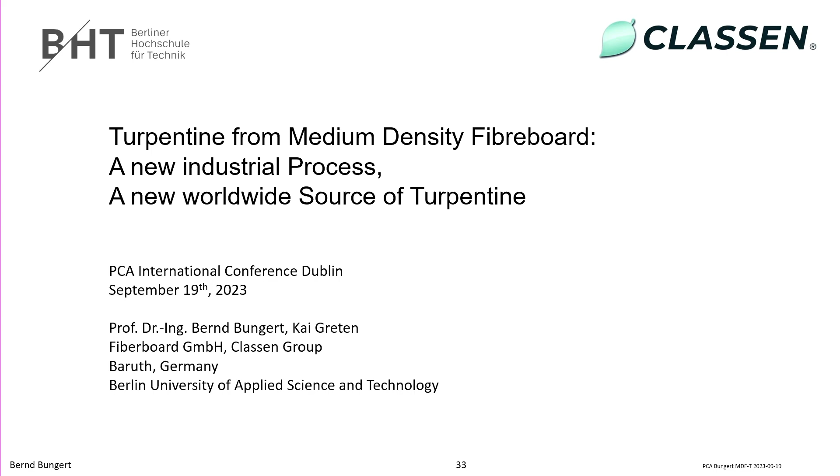11 years ago, I became consultant to a company called Fibreboard. Fibreboard is a producer of laminate flooring as well as medium density fiberboard. They process around 1 million tons of wood dry matter per year. I'm essentially the external process development department, one can say. Even though I'm not a member of the company, I have my office there, so it's quite an interesting situation—I'm working for this company.

As you see here, that's the site in Baruth, 1 hour south of Berlin. On the left-hand side is the MDF factory producing the medium density fiberboard, and on the right-hand side, the white buildings, that's the laminate flooring system. You may know these floor products with a tongue and groove system, where you click together these sheets to cover your floor. Together, this is the largest integrated MDF and laminate flooring site in the world.

Maybe as a matter of scale, you see at the bottom 800 meters width and 500 meters length, so that's quite a bit. On the left-hand side in the middle, that white building is the chip storage—essentially one soccer pitch filled with wood chips, lasting maybe 3 or 4 days. So you have an idea of the order of magnitude. It's a bit smaller than a pulp mill, but capacity-wise and size-wise, it's even bigger.

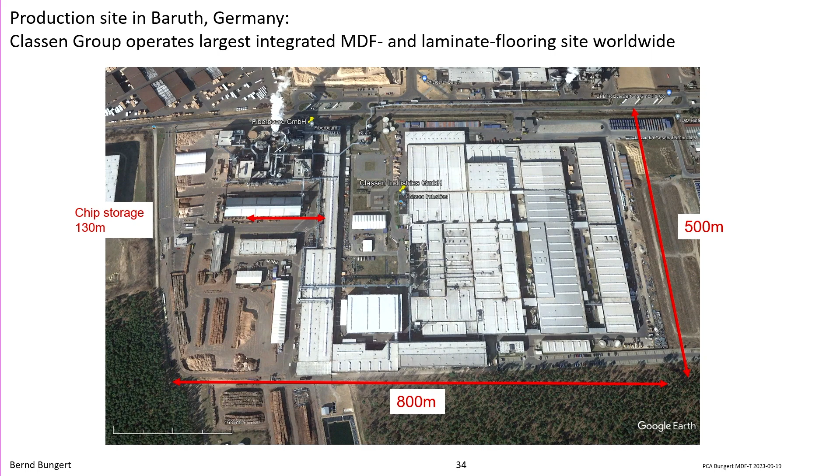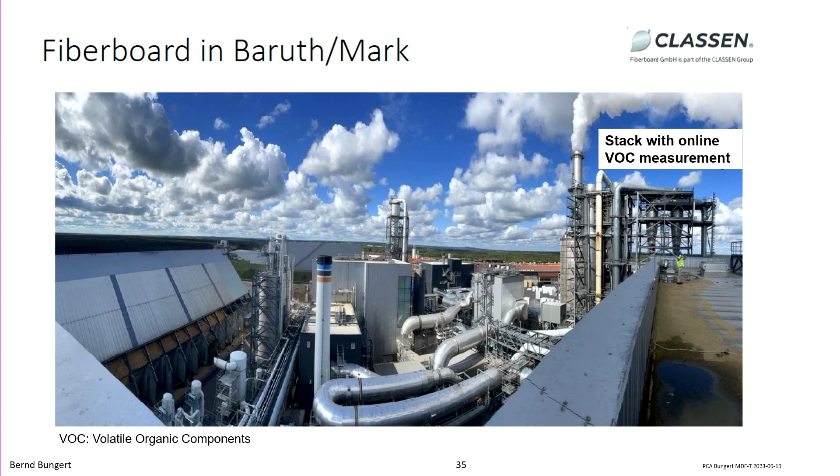This is just another impression, so it's industrial scale operation. You see here a photo of the stack with the online VOC measurement—VOCs are volatile organic components. This is where I started to get involved with pine chemicals. As you can see in this flow chart, the process—just a very quick introduction on that one.

400,000 tons of wood dry matter are being processed: debarked, sieved, washed, and then pre-steamed, being heated to 100 degrees centigrade. This is actually very similar to chemical thermomechanical pulping in the pulp industry.

They're then fed into a digestion unit where they're being digested at 170 degrees centigrade, 9 bars. In pulp and paper, it would be like 130, 140 degrees centigrade.

So far, very similar. Then comes a refiner, that's a rotor stator mill, 2 discs rotating, about that size in diameter. This drive has 10 megawatts. I mean, 10 megawatts is a motor from here to the end of the stage, and we use a 500 kilowatt pony motor in order to start up the big one. So that's quite a bit.

That alone makes 10 tons of steam per hour dissipating the electrical input. That's quite big. Now comes the difference to pulp and paper.

In pulp and paper, the steam and the fibers are being separated, and then the steam comes out anyway, including the turpentine. So these guys need to take care of it. We don't, or we didn't have to until recently.

The process continues. There's quite a remarkable thing. Those 50 tons of wood dry matter, 20 tons of steam, 40 tons of water go through a pipe of that diameter, 150 millimeters, with a speed of 200 meters per second, or like 750 kilometers per hour. That's really remarkable. And then injected into a dryer of that diameter, 50 meters long, 50 meters tall.

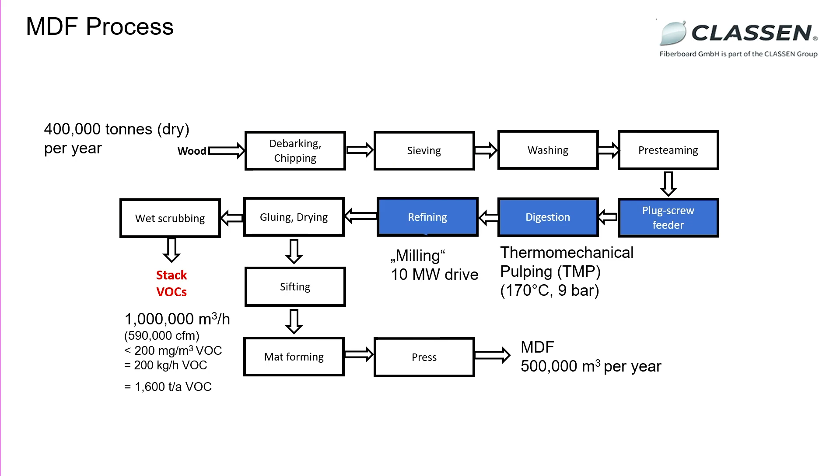Now, the solution in the end led to this. We came up with a new route to produce turpentine. You know, of course, gum turpentine, wood turpentine, even though they're suffering a bit, crude sulfate turpentine. And this is MDF turpentine.

This is from my carry-on luggage. I had it in my toiletry bag and declared it as perfume. If that were to be CST, you would be running away. But you don't with this one. And it's really nice. So that's gum-like turpentine that we talk about.

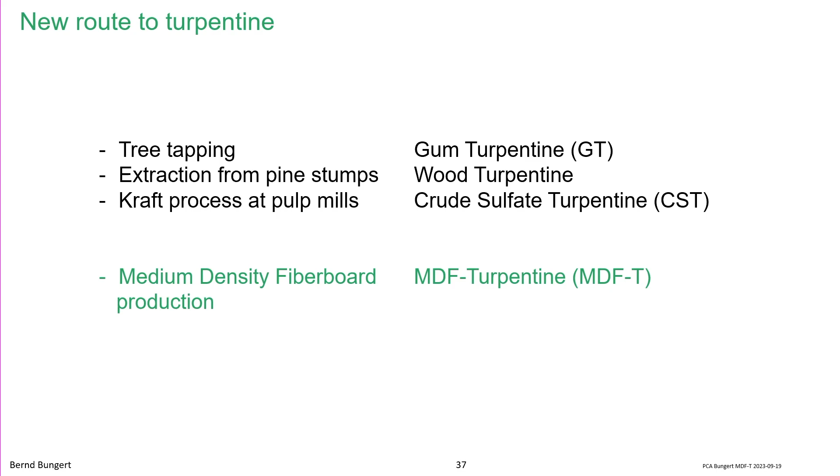And then the next question is, how does that work? What we essentially do is upstream from the place where we add process chemicals, glue and other stuff, upstream, where the wood has only seen steam, nothing else. We take out a certain amount of steam at a certain place, which is quite anti-intuitive, and we can calculate the amount of steam being necessary. That's a fact, a matter of process design, but essentially thermodynamics.

Depending on the amount of turpentine present in the turpentine composition, I can calculate the amount of steam that has to be taken out. What we then do at the moment is we incinerate it, sorry to say, in order to solve the problem. You see the solution on the left-hand side, the concentration goes down to 50 milligrams per cubic meter, 50 parts per million, so well below the emission value of 100. Problem solved. So that was already quite exciting.

Then we realized, oh, wait a minute, there might be a value to that thing in there, those so-called terpenes. That's when I got involved with your industry. Three years ago, I had no idea what rosin and turpentine are. I had no idea at all.

And then we realized, oh wait, we could possibly condense it and then sell it as a product. And obviously, we shifted from the left-hand side to the right-hand side, and we can produce, and we will produce, 150 kilograms per hour or 1,200 tons per year.

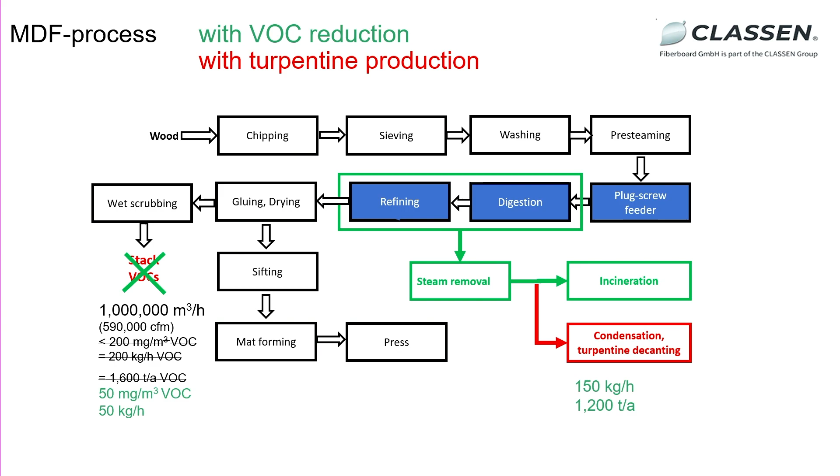Now, how does it look like? This is just a few impressions of the pilot unit we're using, as well as the incineration line. Currently, it's incinerated as a state.

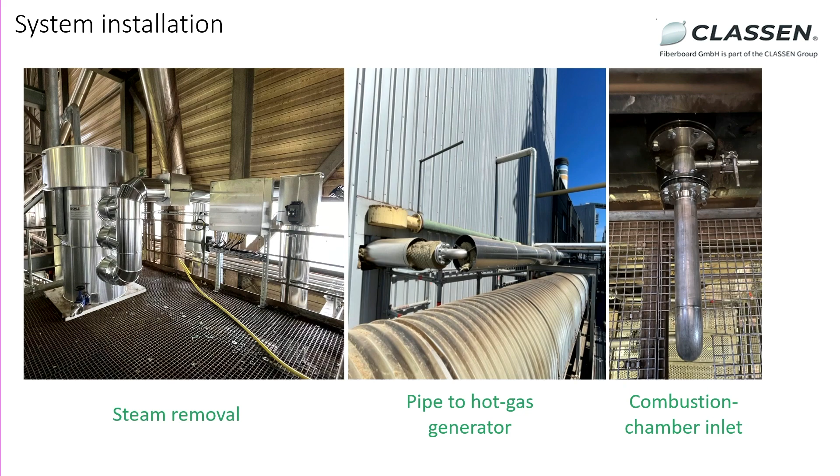Here's a quick summary. First, the emission reduction is an industrial operation. It works very fine, low investment, low operating costs. We even make use of like 1.8 megawatts of heating value, so it's even a plus for the power station. No authority approval needed, that's a quick solution within a couple of months. So the industry is quite happy.

Turpentine, we did the detail engineering already. The design is done, procurement is underway. The plant will start production next summer with 1,200 tons per year. That's the German summer, so that's July. We have authority approval started. REACH certification is granted already, so we can export any moment. We have heat recovery, so the OPEX, the operational expenditure, is essentially close to zero. And there's very fast amortization because the investment is not that high.

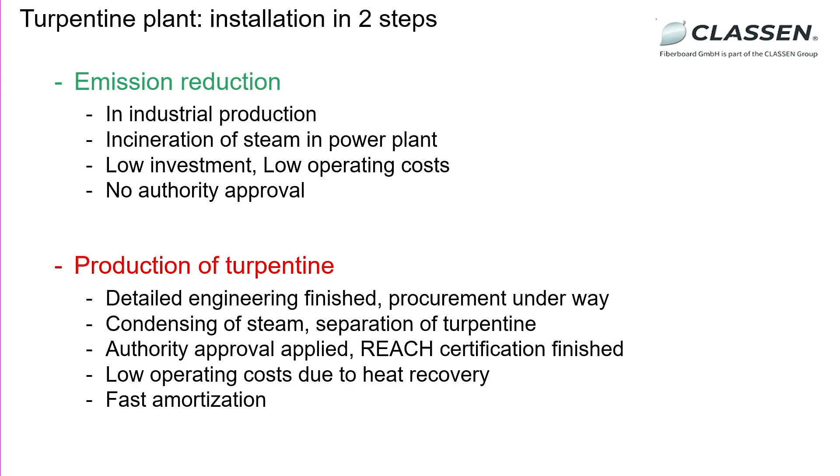Unfortunately, we're using Pinus sylvestris, Scots pine, and as a result we have some 48% alpha-pinene, 3% beta, 35% delta-3 carene. That's the way it is if you use Scots pine. There's no choice about that.

And we produce at pilot scale, we can produce like 50, or at least provide 50 kilograms per hour. So barrel-wise or IBC-wise, we of course deal with samples, but we cannot really produce at scale. And that's what you see here.

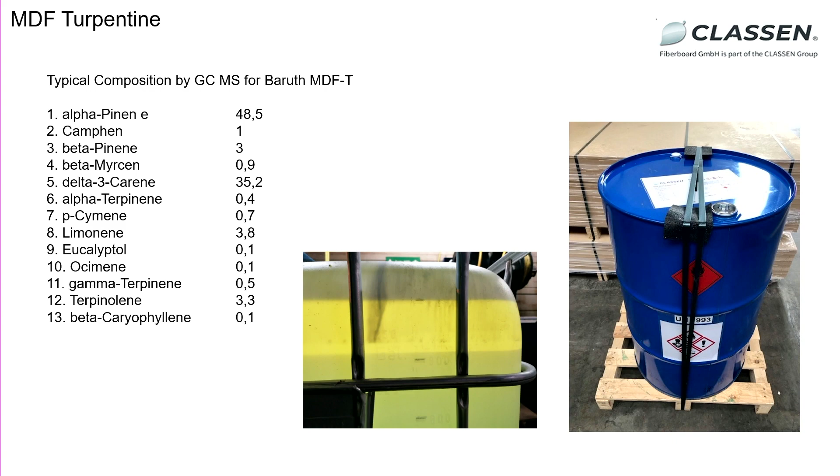On the next slide, you see a book. It's called Die Gewinnung des Harzes der Kiefer, the production of oleoresin from pine. In the former East Germany, German Democratic Republic, there was extensive tree tapping until 1989. When the wall came down, it immediately stopped because of labor cost. So it stopped immediately. But they were, of course, investigating that thoroughly and actually sent that book to Alejandro Cunningham because they have described extensive tree tapping techniques there and also how to stimulate the tree.

Quite interesting, we source our pine from the former East Germany as well as from the Polish National Forest. And therefore we have, of course, a very similar composition. You see here, this composition is very similar to what we found earlier on and what I reported. So the message is the process does not change the composition. Our turpentine is essentially the same as the former East German gum turpentine, unfortunately made from Pinus sylvestris. But we can change that.

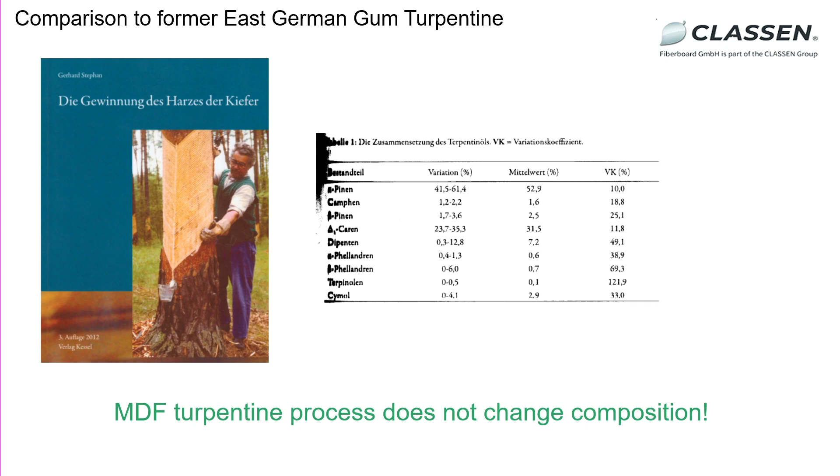The next slide shows you our emission values. They're not really important to you. You see they're high on the left-hand side. We start our method, they are low after that. But what you can see is it's a stable process, a stable process in industrial operation.

That's the message. And once we have a line of steam going from A to B, which is the power station, it's very obvious that if that runs so stable, we can easily take that steam and instead of incinerating it, condense it, subcool it, decant it. And the rest is very similar to CST recovery. Once you know where to tap the plant and how much steam to take out, the rest is normal chemical engineering stuff, not a problem at all.

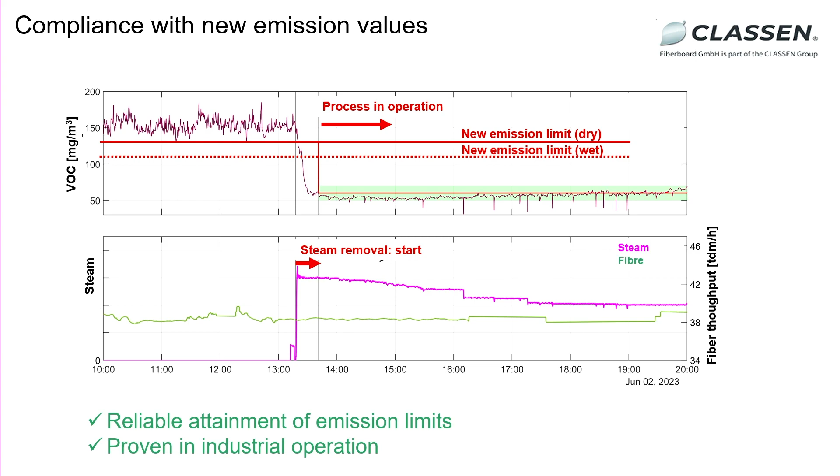So the benefits are obviously, first of all for us, we meet the EU regulations. If you build a new plant in the United States, you would not go for maximum achievable control technology, which is buying regenerative thermal oxidation. That's very expensive, millions of dollars of natural gas being fired to operate that. But you can go for BACT, and indeed there are companies considering that at the moment. So operating costs, millions of dollars, can just be avoided.

And then, of course, our subject here is revenue creation by turpentine production, and you can actually do both. I want to mention there's no influence on product performance, which is important because we don't sell turpentine, it's only a side effect. We sell medium density fiberboard, of course. So the product is not involved at all. Low investment costs and almost no OPEX.

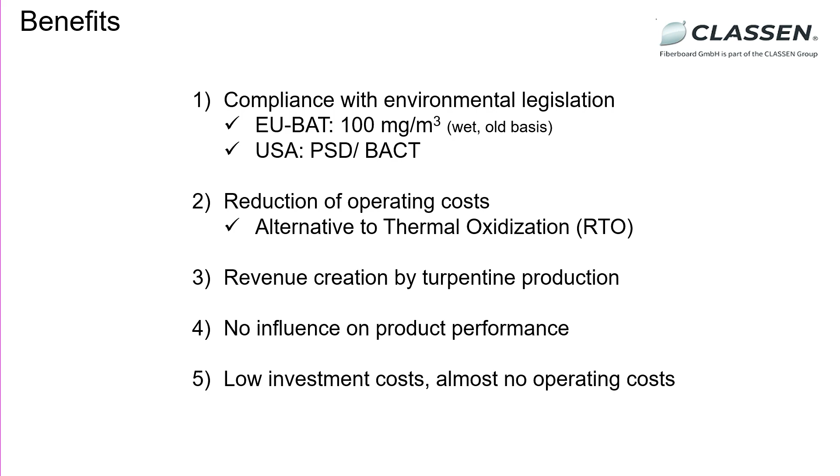That gives rise to the question, where does the product go? This is something that you know, of course. This is the CST route, the gum turpentine route going to the CST distillers. Many of them are around here, of course. And there are also distillers who do not take care of CST, so I call them gum turpentine distillers. As you see, our material can go either way, either to the CST distiller or the gum turpentine distiller.

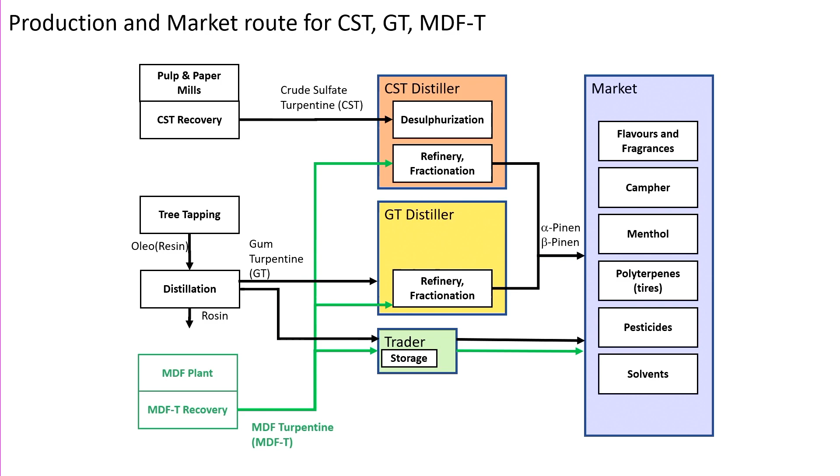Now let's take a look at the market for crude sulfate turpentine. We see the numbers that Michel is giving us. Thank you very much, Michel.

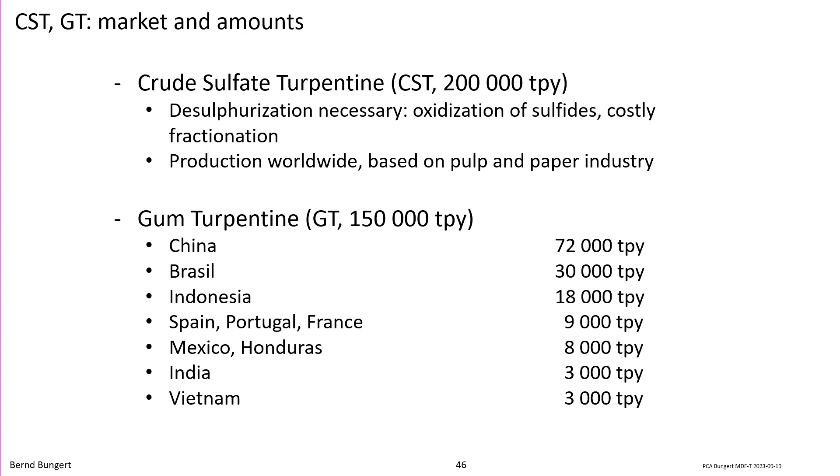I'll give you some business cases later on and we'll show you there will be local sourcing possible. If you ship a container, an isotainer with turpentine from Europe to India, that would mean you'd spend some $200 or so, plus minus, just an order of magnitude.

You'll also ship some carbon footprint with it. That is not good for the product if it's a consumer product. On top, in our case, it's a good story because we put something bad into a bottle and sell it. So that's quite a nice story. In the end, MDF turpentine combines all the advantages of all those processes.

Now, how much is it? The next slide will give you first of all a theoretical overview. The total amount of medium density fiberboard produced uses some 112 million cubic meters. That boils down to around 92 million tons of wood dry matter. That's a bit less than pulp and paper, but it's quite a number, obviously.

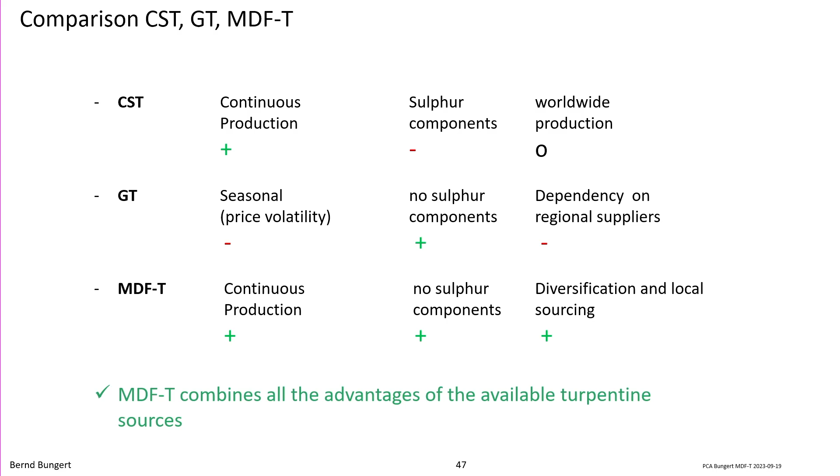You also got to consider, and then I go to the next slide, some 50% use pine. Then there's spruce and fir, because softwood is essential, as hardwood gives bad mechanical properties. And some also use acacia, rubber tree, and eucalyptus. But in the order of magnitude, 50% use pine.

So here's the numbers. In Europe, there is around 20 million tons of wood being used, giving a theoretical value of 58,000 tons. 50% of that would be like 30.

In Asia, one must say the 65 million cubic meters are nameplate capacity. It is not really known how much is produced there or how good they are in operation. Anyway, the theoretical number would be 180, and then half of that would be 90.

Australia and New Zealand have 6 plants that I'll show you, giving a potential of like 3,000 tons. And then we have North America: 12 factories in the United States, 5 in Canada, 5 in Mexico, giving this amount that you see there.

And then there is 8 million cubic meters, or 6.5 million tons of wood in Brazil. As you know, they use, for example, the Pinus Elliotii. There's one plantation where an MDF factory lies in the middle of a Pinus Elliotii plantation. That's, of course, very exciting.

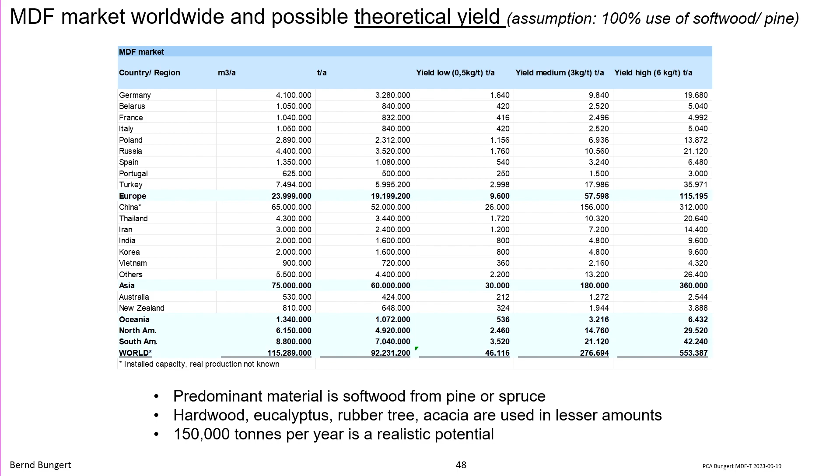Other trees as well. So that gives these numbers, and now the question is how good is the material and what is the business case for an MDF factory? The next table - you might think, oh my God, I can't read this table. You shouldn't, because it's just an action painting. What I want to tell you is we are compiling data from all over the world, considering different pine species, with their alpha-beta content as well as the yield in kilograms turpentine per ton dry matter.

In my lab, my co-workers are permanently doing steam distillation to analyze wood samples, steam distillation for the yield, and then GCMS, of course, to determine the alpha-beta content. So this table is constantly filling, and please feel free to share information if you have or want to with me.

On that basis, I was compiling the yield, and then I defined a quality factor. The quality factor is nothing else than the alpha plus beta content divided by the alpha and beta content for Pinus Elliotii, which is around 0.9, giving a quality factor.

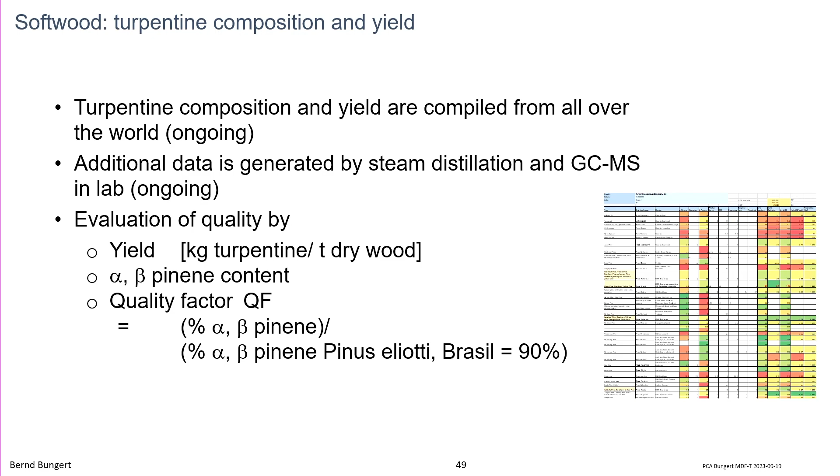Brazil, the one I mentioned, with the Pinus Elliotii, 600,000 cubic meters. Then there is the US, but unfortunately only one with Pinus palustris. There is Australia, Pinus radiata, with a wonderful beta content, of course. And then we have Portugal, Spain, maritime pine, Pinus pinaster, and then Turkey with also Pinus sylvestris. However, the alpha-beta content is higher because the tree reacts differently in that climate, and their plants are quite big. It's a totally different market.

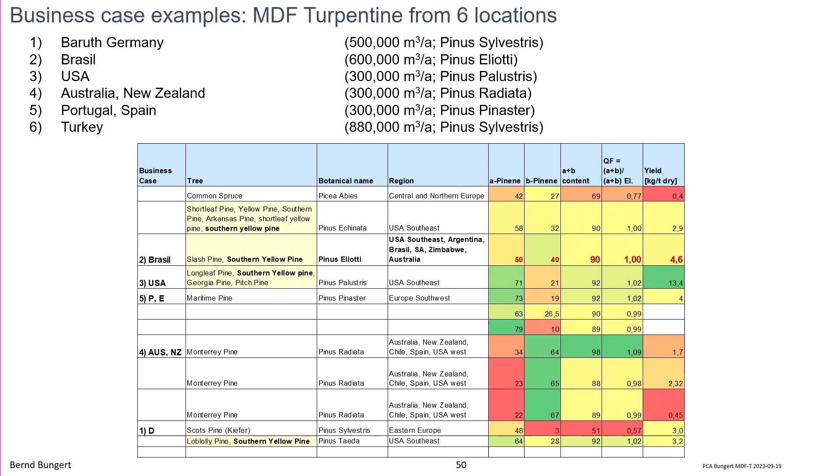With that, I calculated the amounts. As you can see: alpha pinene, beta pinene, AB content, the quality factor, and then the yield in kilograms per ton dry matter. Let's take a quick look at those factories.

You see here, South America on top, Brazil in the south. You know all those locations and where they have the pulp mills, the timber factories, and the tree tapping. This is also where the MDF factories are located. Down you see the US, especially in the southeast, where you see all the MDF factories for a good reason, of course. And if you look at Pinus palustris, this is their typical habitat in the US southeast. So we have the MDF factory, pulp and paper, and of course many of your companies are located down there in the southeast of the United States.

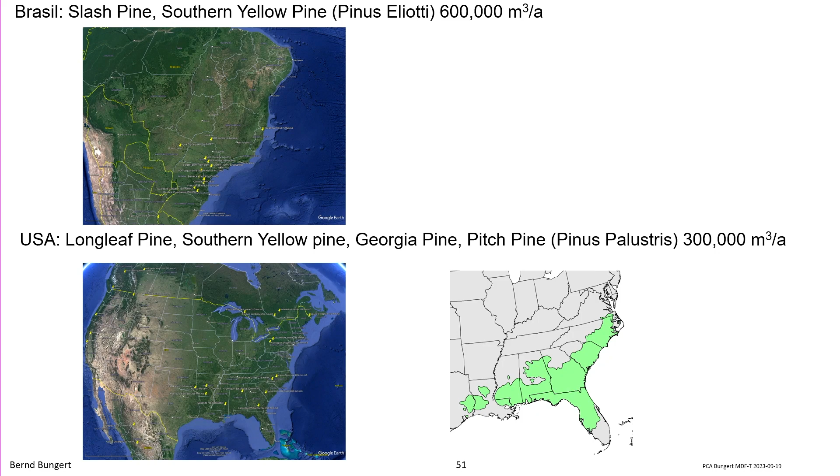Here you see Australia, sorry it's a bit small, 3 plants, MDF plants on the east coast. New Zealand also 3, and they use Pinus radiata, typical plant size 300,000 cubic meters. There is a turpentine distiller in New Zealand, of course, and the gentleman working there is also here, of course. I was also talking to Lou, who is involved there.

In Portugal and Spain, 9 factories, Pinus pinaster, 9 MDF factories, and we all know there's one big distiller in that area, and then a bit up north, and there's 2 distillers a bit down south from there. And so again, we talk about local procurement and some very interesting material.

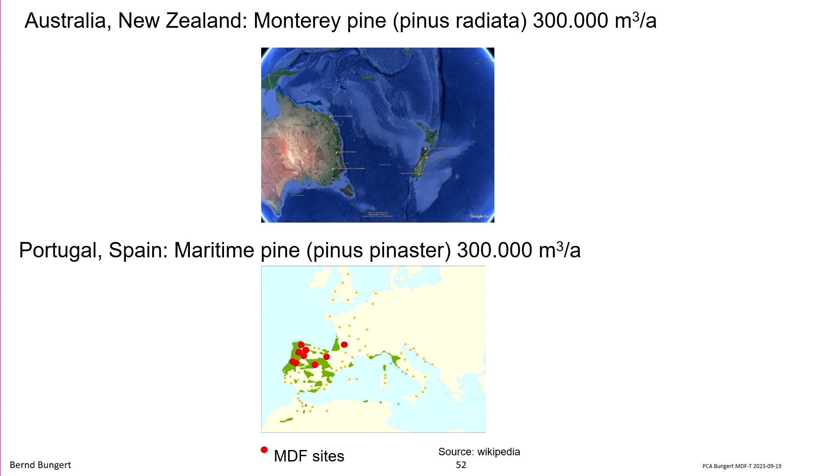This curve you can download at the Brazilian export statistics. It's open. So I did, and the last numbers from August show the gum turpentine price of Pinus Elliotii from Brazil, free on board. The last number, which is the August number I just inserted, is obviously under $2,000 per ton.

My subject is not business at that point, or at least not numbers. However, I wanted to give you an order of magnitude to have an idea about what the business case could be. So I took the 13-year average, which in this case is $2,300 per ton. It's a hypothetical value, of course. I know the price is down at the moment, but it will give you a fairly good indication of how a business could look like.

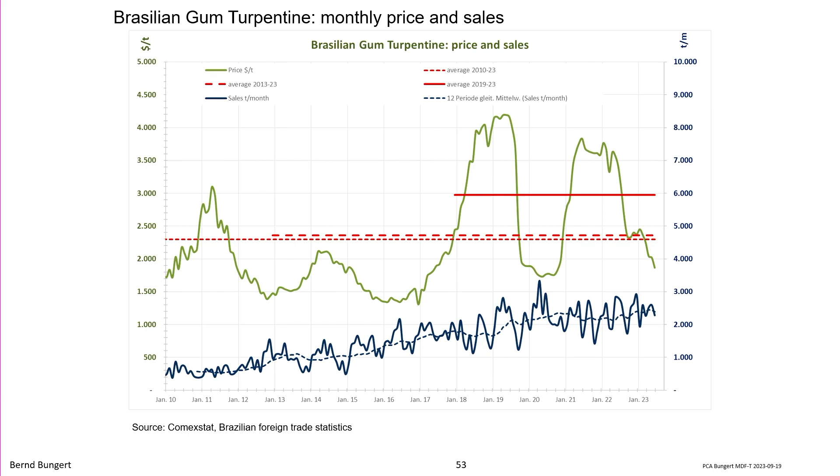Let me state one more time, most of those values are theoretical or literature values, because I have not analyzed the very wood that is going in there. In case number one, yes permanently, the other cases not, so that always has to be double-checked by steam distillation or analysis of the wood you use. So those are literature values, but from what I saw, they're quite good actually.

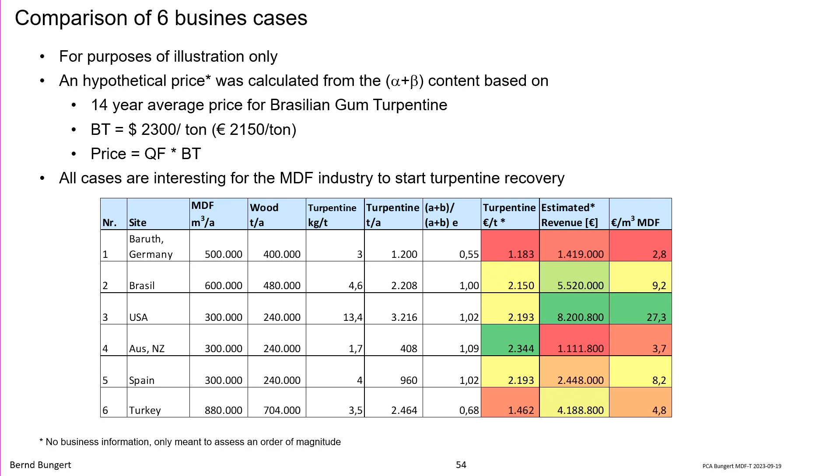The timeline for the project, how does it look like? The emission thing can be done within a couple of months, no problem at all. If you have a problem, or the industry has a problem, within a couple of months it can be solved, and that is not really a problem. It's very quick once you know where to tap the plant.

For MDF turpentine, the installation goes within around 1 year, depending, of course, at the moment automation equipment is a long lead equipment, rather funny, but this is also getting much better. We do a process design package giving you the process engineering information, and with that you can go either to a CST recovery contractor or any decent engineering company that's going to build it for you. It's not really that complicated once you know where to go.

We provide 2 sizes, we do it modular. You saw 300, 600, that's around the order of magnitude. 2 sizes design, and there are 3 options for heat recovery. And there are enough heat sinks to get rid of the heat for condensing, so that's why it is neutral. And that's the turpentine recovery thing.

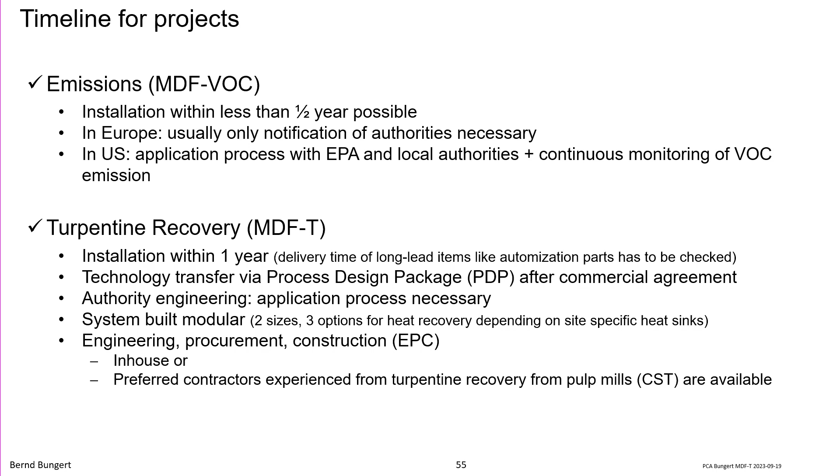We developed the market by selling licenses. First of all, for the VOC reduction thing, because obviously there's high pressure and quite an interest in the market there, that's why we started there. We start now with the turpentine recovery. Since our reference plant, our first one, starts next year summer, our summer, July, it's obvious that nobody else will do it before that, but after.

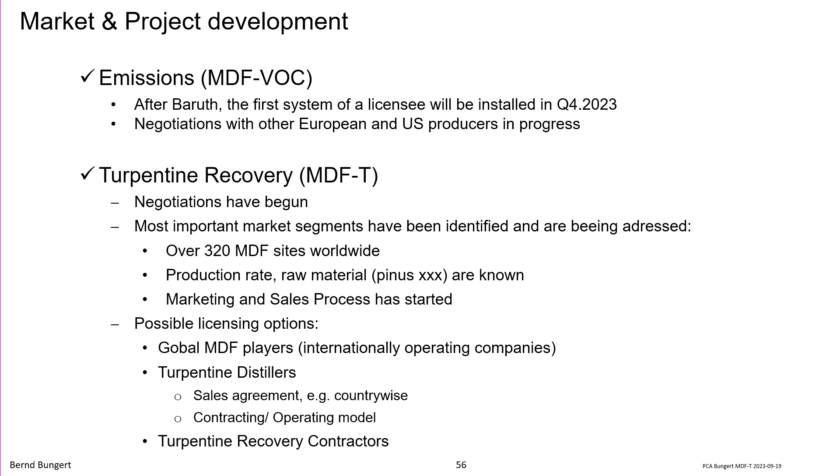And we are currently exploring different licensing and cooperation models. I've been talking to quite a few of you, and that's why I'm also very happy to be here today. Let me shortly summarize and come up with some conclusions.

So there's a new route to the turpentine. Nobody else has done it before to tap an MDF plant in that order of magnitude. We solve environmental problems, and at the same time create revenue for the MDF producers. The worldwide production potential is over 100,000 tons per year, which is a remarkable number, obviously.

The yield and the composition depends, of course, on the tree and species you're using, so that's crucial to select the right plant with the right raw material, that's obvious. And yeah, we have found a completely new business in the pine chemicals industry and have started that.

You will find the references at the last slide, and I thank you very much for your attention. Thank you.